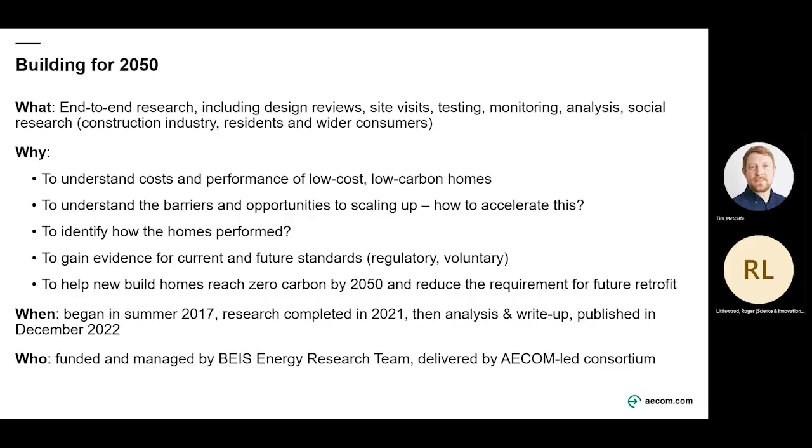So our approach to this project was to study in depth 4 case studies across different tenures, and to really look right from the very beginning, the decisions why people chose to do low cost, low carbon homes, all the way through to the resident experience of people living in them for a period of time, monitoring that performance and what they experienced.

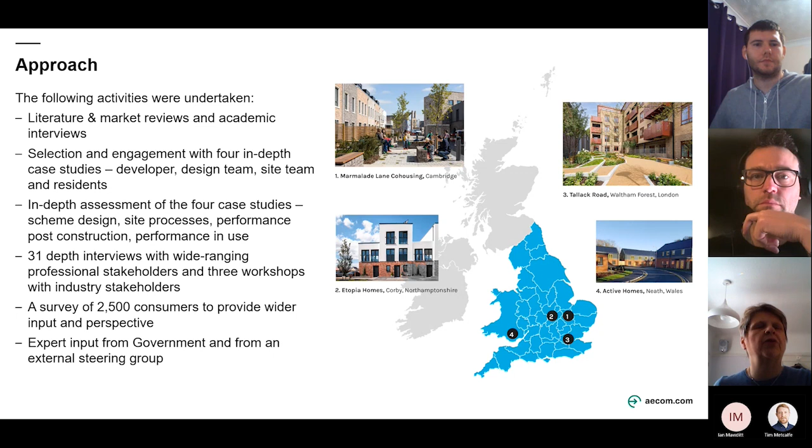Having started with a literature and market review, we did in-depth case studies, and then professional interviews to supplement the case studies to get a wider view from the industry, including some workshops with industry. We carried out research with householders and residents within the homes, but then topped that up with a survey of 2,500 consumers to get a wider perspective. We also had expert input from government and from an external steering group.

So a wide range of experience has been captured through this project. The developers had different drivers and funding models, and the design teams also chose a range of different routes to deliver low carbon homes.

We believe this project is unique in that it focused on social research with developers and design teams, in-depth studies during construction, post-construction testing, and then social research again with residents through interviews, monthly diaries, focus groups, etc. We also carried out a comparison with SAP to see what difference the results measured on site through post-completion testing gave when applied to modelling compared to predicted energy performance.

Overall, we looked at how low carbon homes fit within a changing energy system, and possibly one of the most interesting things is the review of additional capital costs, and how much that is a barrier or not for developers developing these types of homes.

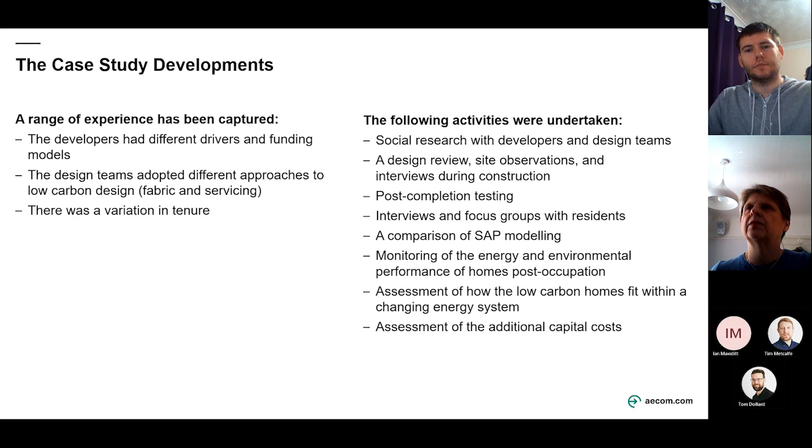To cut straight to the findings, we'll hear more about the process as we go forward. Really, the main driver was policy and regulations. Building regulations, but also planning policy, were very important within these projects, and were reasons why people chose to go beyond required energy performance. There is increasingly a business case to do it, with more funding driven by ESG funding and investment groups, and that was a change during the course of the research.

Some of the projects had low carbon stakeholders driving the innovation. That could be an expert group, such as an academic body or an individual company with expertise, or indeed a wider perspective—for example, in the Swansea City Deal vision, looking at how the use of local timber could boost the local economy as well as driving forward low carbon homes.

Some of the schemes had grant funding, and that provided an incentive as well. If it's grant funding for innovation, then those developing homes that were going to qualify for that were looking to really maximise the use of innovation and different technologies.

Overall, during the course of our study, we found increased awareness of the climate emergency, which might range from councillors through to residents, and that drives the desire to deliver against that through low carbon homes.

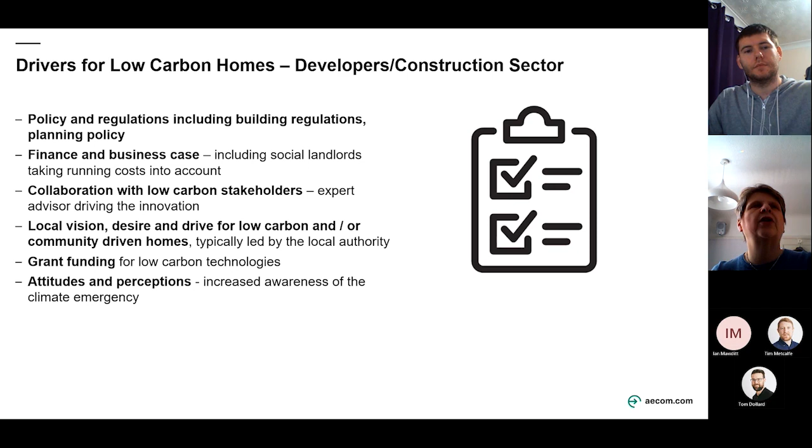Increased cost and scheme viability was less of a barrier than originally thought. We found that some of the developments only had an increased cost of 1% to 3% more, whereas initial discussions with stakeholders suggested they perceived it likely to be a 5 or 10% increase in cost. The cost increase very much relates to the simplicity of design—those with a higher cost had focused more on innovation and had achieved grant funding towards some of those additional costs.

There is a concern that acts as a barrier, the concern about the lack of electricity. Each of these homes had an electrical form of heating and no gas, meaning they're dependent on the national grid to provide that electricity. There's a whole model here whereby the upgrade, if necessary, for local infrastructure such as electrical substations is borne by developers, and not in the traditional way of paying back simply through standing charges, as would be the case for gas infrastructure being provided.

Another barrier put forward is that some developers have concerns that if they price in the additional cost of low carbon measures, then the price they can offer for a site would be a bit lower than for somebody providing to a regulatory benchmark or minimum performance. Therefore, they have concerns that if they can't pass on the cost through increased sales prices, they won't be competitive and won't actually be able to deliver homes in the first place.

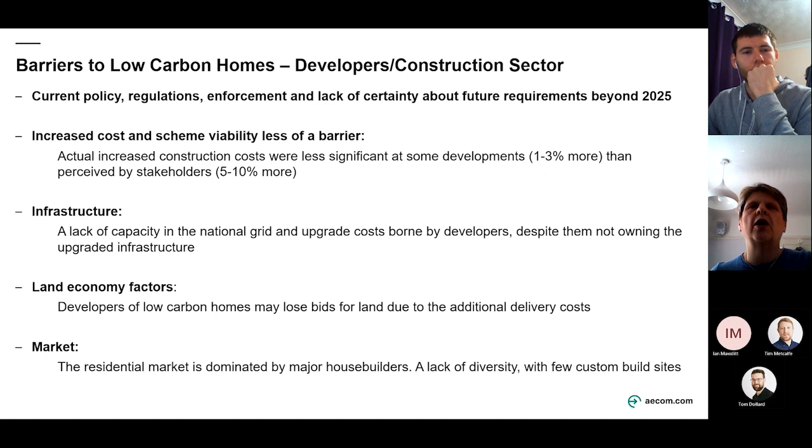The final barrier here was that the market is dominated by major house builders. At the time, there were no major house builders building low carbon homes. So if that's not being taken forward by the major house builders, then those who are SMEs trying to get into the market will struggle.

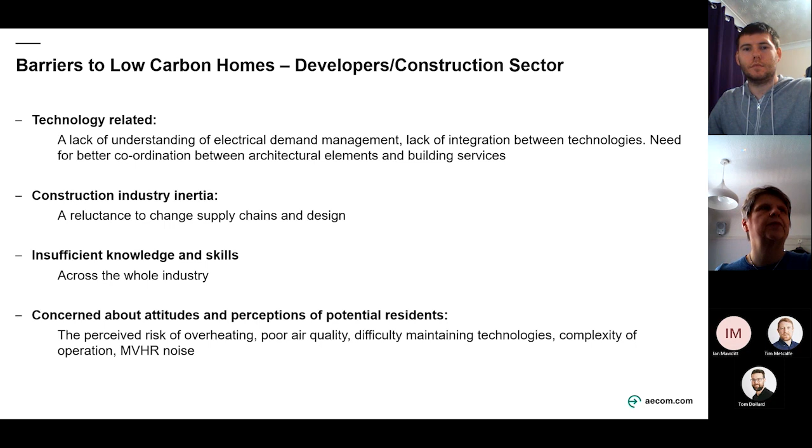So that was what we were being advised at the beginning of the project were the barriers for developers and the construction sector more widely. After the full five years of research, focusing in detail on the case studies, but also the wider inputs that we had from industry and from residents and householders in general, we ended up with lots of learning points. Firstly, focusing around supply and demand, and then secondly on performance.

So industry groups feel they need certainty on the future for low carbon homes, what the scope will be, what the timing will be of regulatory requirements, where planners can set the bar if they wish to go beyond regulation, so that they can plan ahead. So we are talking here about a step change in the performance of homes. This project was around low carbon homes. We're now very much hearing zero carbon homes.

And if the industry has to gear up for this step change in what they're providing and in the performance of these homes, then they want certainty on when these changes have to be made, and they need notice and they need to plan for it. So if a developer is master planning a site at the moment, these homes might not come forward for the next 10 years. And so without this longer term view, it's extremely difficult to make plans and provisions for low carbon homes.

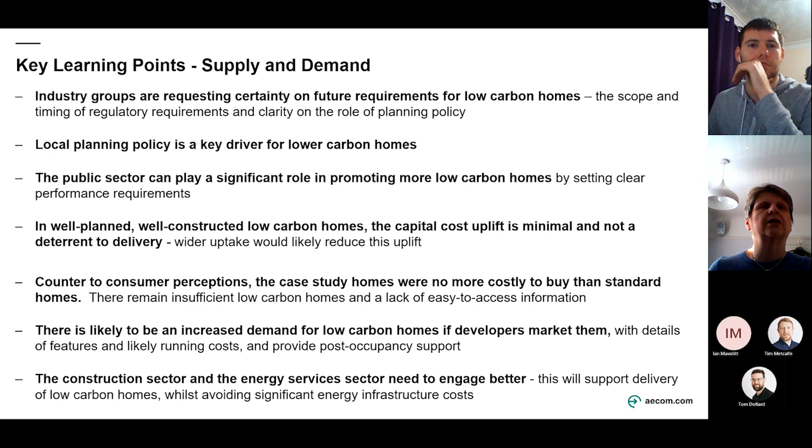And the construction sector doesn't seem to really have understood that energy use is a key part of home design as we go forward, and they need to better understand what the energy services sector can offer, from the forms of heating within the home through to means of avoiding significant energy infrastructure costs through balancing demand and it not all happening at the same time.

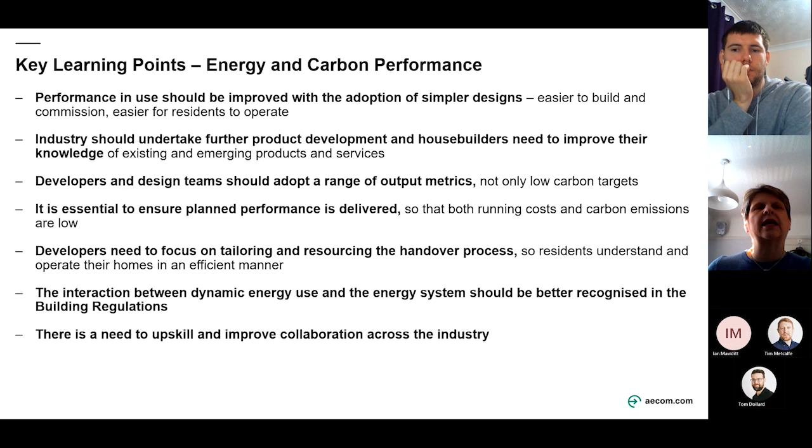and then all the way through to commissioning homes correctly, getting systems right, making sure they're accessible, ensuring that there are people in the industry trained up to be able to maintain heat pumps and newer technologies, all the way through to the handover, which is often done by the sales team. So even the sales team need to know what they're offering, and before that the marketing team, so that people understand what their new homes are and can get the best from them.

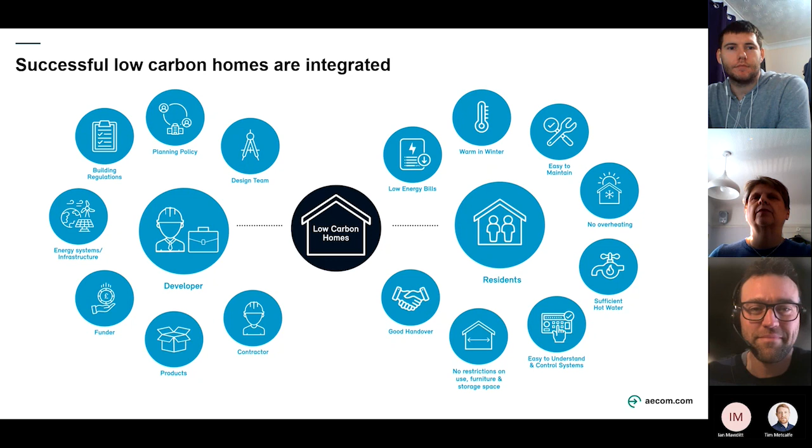Thanks, Alison. Hello, everybody. I'm Tom Dollard, partner of sustainability at Pollard Thomas Edwards, and we were leading on the design reviews, site reviews, and stakeholder interviews of the low carbon case studies.

And the design review and the site reviews were really there to show us what were the practical implications for industry, what were the practical implications across the case studies in terms of program, cost, the design, the layouts, even the look of the homes, and the buildability, whether these homes were more difficult to build, whether they presented any unique problems for the contractors and for the supply chain, and any more specific site implications that we found.

So we carried out a detailed review from the beginning of a project. We were there with the brief, the pre-planning, detailed design, all the way through to site and handover. And we had typically 7 site reviews, 7 site visits to assess and witness all stages of construction. So next slide, please.

So the four case studies, this was the first one, Marmalade Lane in Cambridge. And this was a co-housing community, 42 homes. There were some apartments as well as some terraced houses.

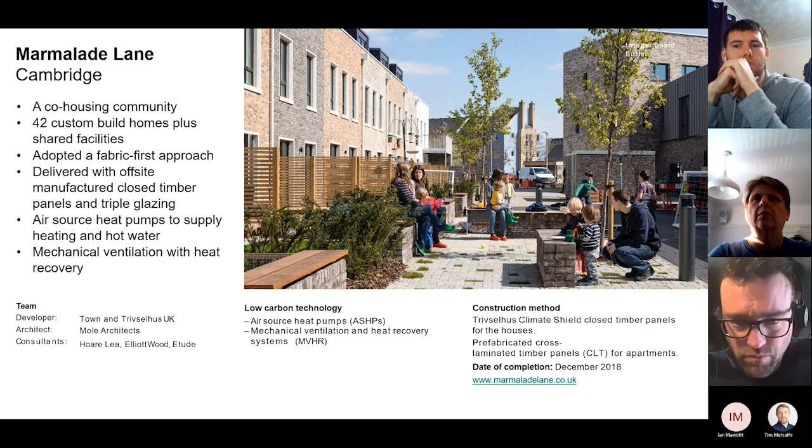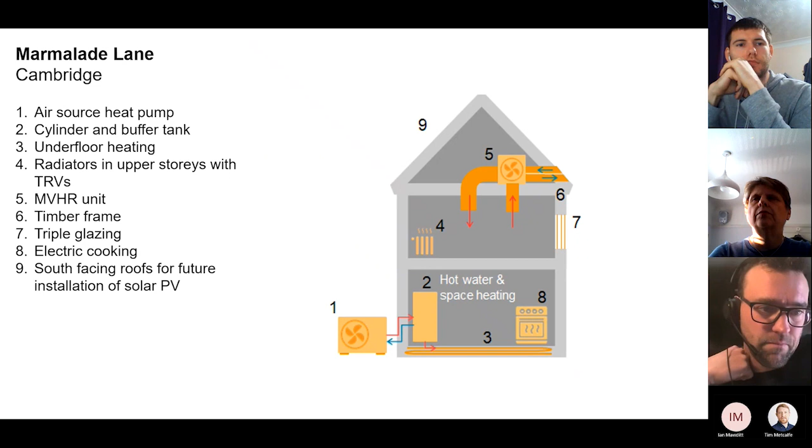The second case study was in South Wales, in Neath, and this was a social housing landlord, Pobl Group, so affordable rent, 16 social rent homes.

And then the PV fed individual batteries on each house, and then there was the hot water provided by an air source heat pump with a preheat provided by transpired solar collectors. Again, it had some on-peak electric space heating as well, and MVHR ventilation.

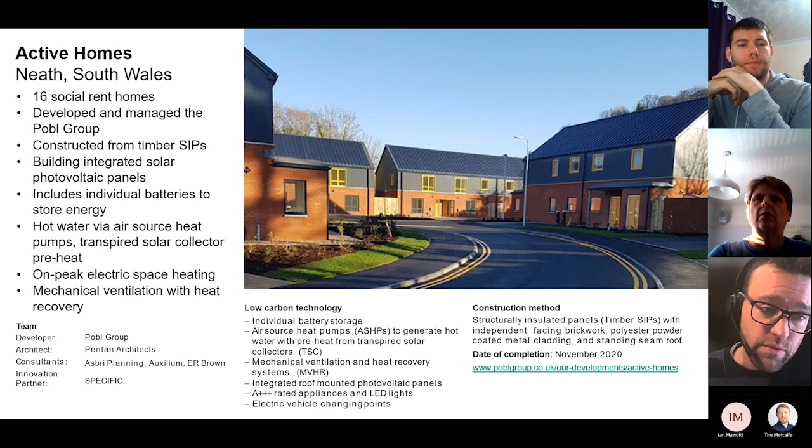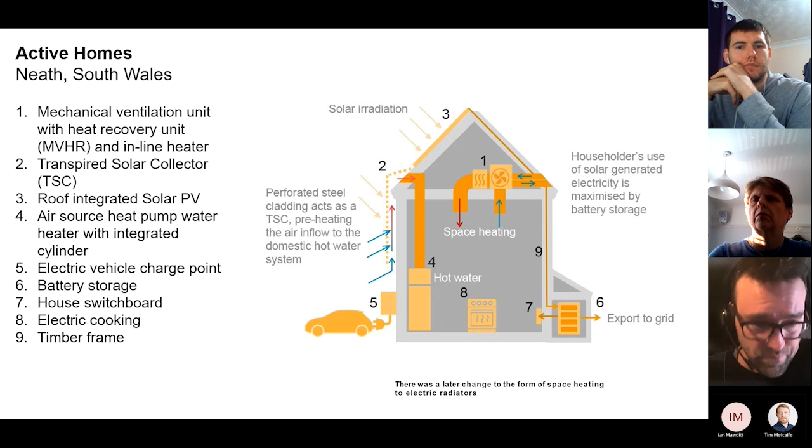The third case study was Etopia Homes in Corby, 47 homes this time, slightly larger. Again, it was with MMC construction, this time using steel SIPs, so a steel panel, and a small format panel as well that was put together by hand on site. And they were aiming to be energy positive.

The previous case was aiming to be active homes. This was quite similar in that it was meant to be energy positive over the year. And it did that with a lot of PVs on the roof, some PVT on the roof, PV thermal array, and a ground source heat pump with an earth store energy bank. So again, quite a complex MEP system. And then it had a smart home energy management system.

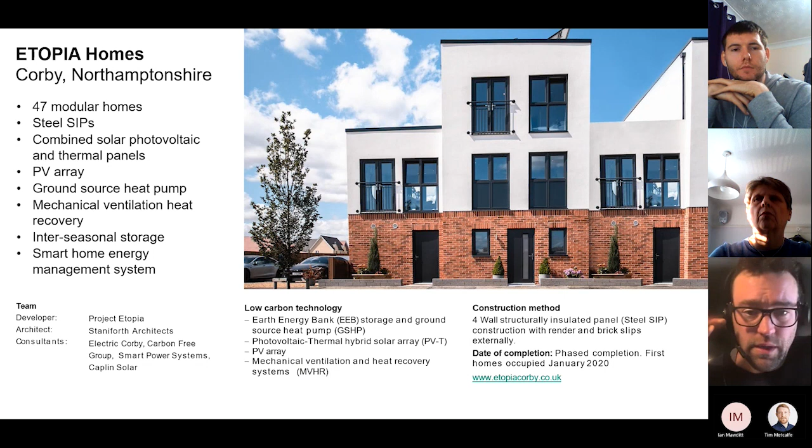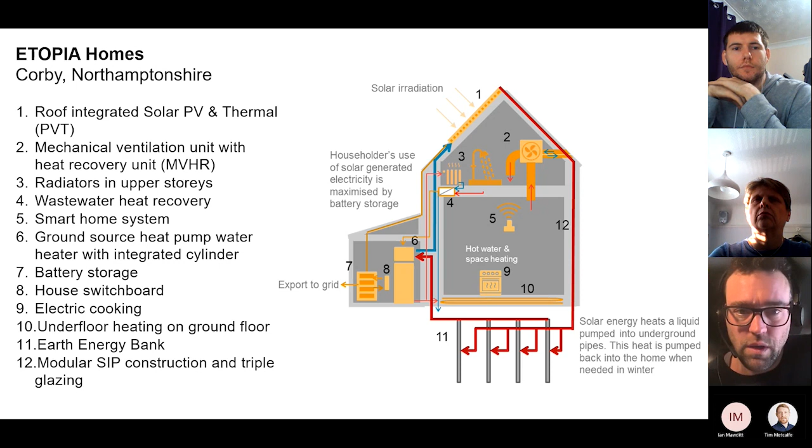The next slide shows the schematic of how that works with the Earth Energy Bank and the ground source connecting into the cylinder, and then you've got the PV and the PVT charging the battery. And the final case study was in London, an apartment scheme this time with two townhouses to the side of this apartment block.

This was innovative and low carbon because of its air source heat pump. It was a communal air source heat pump providing an ambient loop that linked to water source heat pumps in each flat. A relatively innovative solution, also supplemented by solar photovoltaic panels. And to note, this was a traditional brick construction with a concrete frame, so fairly normal construction for London there.

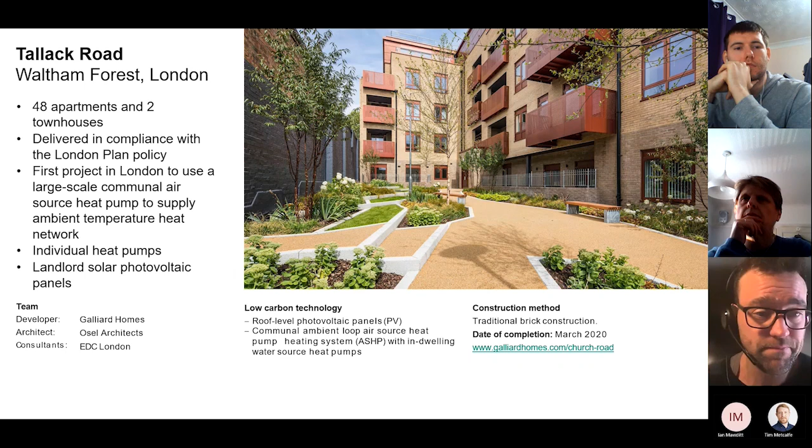This schematic shows how that ambient loop is fed by an air source heat pump on the roof and then connects to the individual heat pumps in each flat.

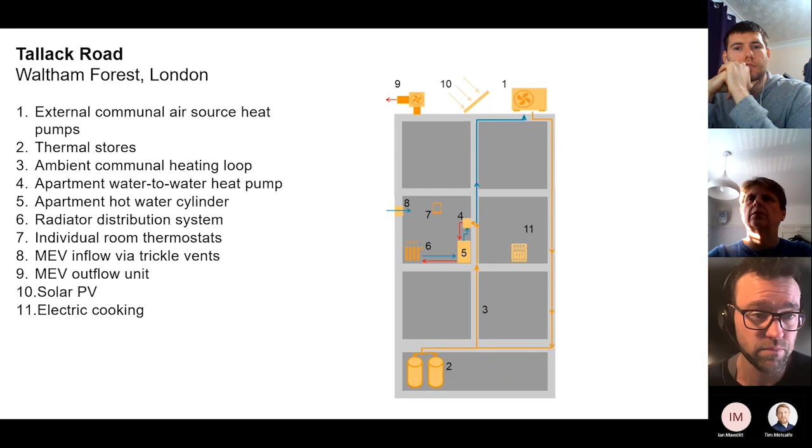So why had that been the case? The main finding was that there are a variety of different ways that you can deliver successful low carbon homes. Generally, they required electric heating and hot water, so in this case, they're all a type of heat pump.

And we also find that complex designs have been simplified further on. Some of the developers, all of the developers are still in business, and they've simplified these designs on their next sites.

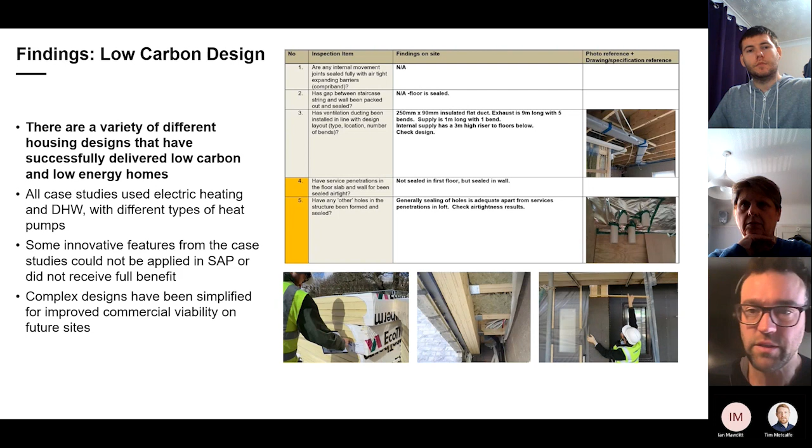In terms of the cost, we analysed that at various different stages: the construction estimate prior to construction and the final account after construction. We can clearly see there is an additional cost to low carbon homes. Some of these case studies that were able to refine the design and go through a value engineering process showed that to be 1 to 2.5% extra. But then some of them, where they had grant funding and a more complex design, were up between 10 and 20% extra. So the cost uplift depends on the source of funding, and it's obviously linked to the design and the complexity of the installation.

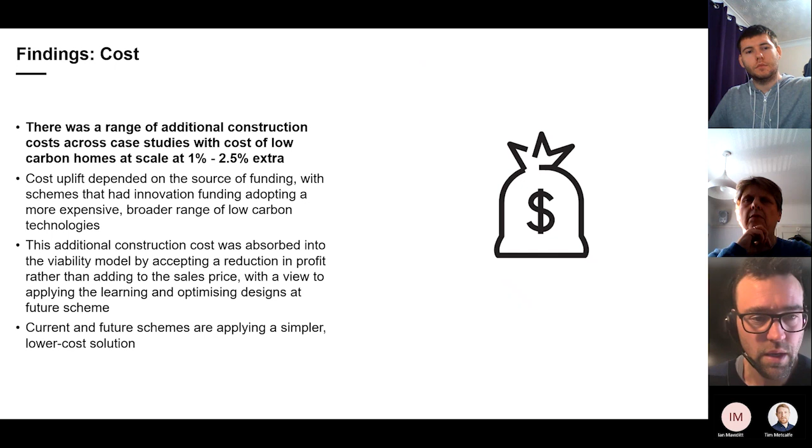And then the skills gap, Alison mentioned that in the findings. We saw that on site and in the design review process, where we were part of meetings as well, that there is a shortage of skills across the industry at each stage, and that's going to be a challenge for scaling up. We also saw that developers were unfamiliar with specialists providing low carbon services, so that link between the energy system and the housing industry being a gap.

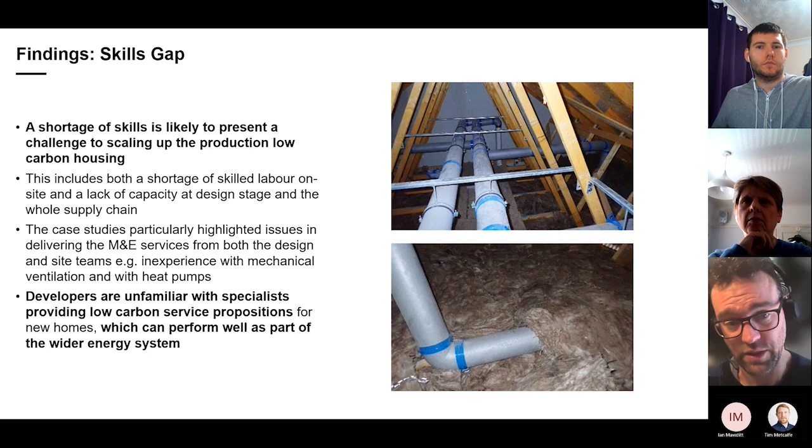And then just a note on MMC: we had 3 out of 4 of the case studies delivered using a panelized system, and we certainly saw the benefits in that. We saw that the panels themselves were performing very well, and I think Ian will show you a bit more detail on that. But they do depend very much on the design still, and the junctions between site and the interface between site and the factory is critical.

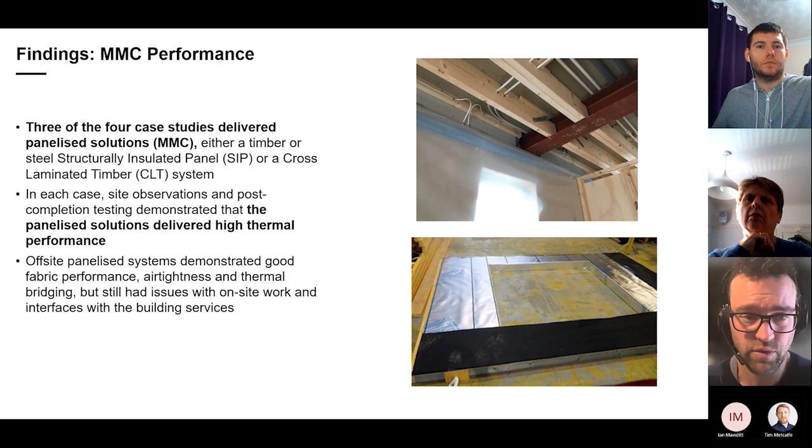I think that's it. Yes, over to Ian. Thank you.

Thanks, Tim. So yes, I'm Ian Mawditt. I'm a building performance researcher at Fourwalls Consultants, and I'll give you a summary of the findings from the post-construction testing and the in-use monitoring that we carried out at the developments.

Next slide, please. I'll start with the findings from the post-construction testing. We conducted a number of tests. This typically included coheating tests, in situ U-value measurements, thermography studies, and air tightness testing and ventilation measurements. Many of the tests are to evaluate the fabric efficiency of the case study dwellings. Typically for the post-construction testing, we studied 2 sample dwellings on each case study development.

What we tended to find across these developments was that, for the measured U-values, these were often found to be quite comparable to the design values. The biggest issue we tended to find on the fabric side was the air tightness and thermal bridging. There were still some challenges there. But overall, the fabric was generally better than equivalent new homes that are built to meet the minimum standard for energy efficiency and carbon emissions under Part L.

Using these findings from the post-construction testing, we recalculated the SAP calculations and compared those with adjustments to those provided by the developer as part of their Part L compliance submissions. For the fabric efficiency part, the DFEE value in SAP, we found that the adjustments with the post-construction testing saw a 10% increase in the fabric efficiency figure, so that's poorer than the developer's SAP. In one case, one of the schemes was twice as bad as predicted, so 100% poorer than predicted. But in that case, that wasn't necessarily to do with defects found through the air tightness and thermal bridging alone. That was simply the readjusted SAP taking into account heat losses through the communal walls into an unheated corridor area and communal areas that hadn't previously been accounted for in the developer's SAP.

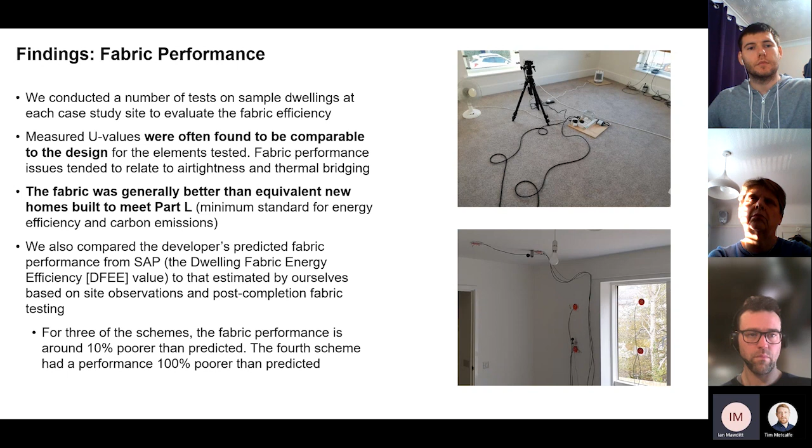Next slide, please. As mentioned, one of the areas where there were challenges was the air tightness. A lot of the schemes had set themselves fairly challenging air tightness targets. In all cases, the design air tightness was below an air permeability of 3 meters cubed per hour per meter squared of envelope area at 50 pascals.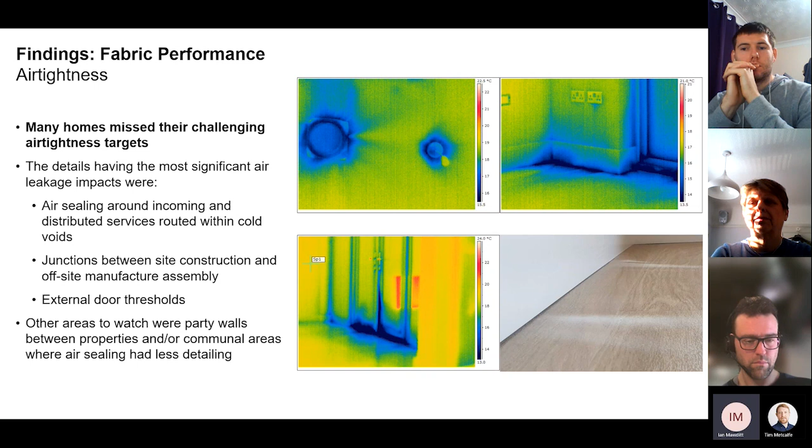The other area where there were challenges was associated with thermal bridges. In this case, the top left image, the yellow and red areas show heat loss coming out of the building.

The column shown in the image shows the temperature gradient, hot at the top with the red colour, and the heat being transferred down the column.

So balconies and steel penetrations through the thermal envelope of the building were found to be weak points.

Also, thermal bridges occur at external door thresholds, where the structural components of the external door have tended to disrupt the perimeter insulation. That was another key thermal bridge finding on many of the developments.

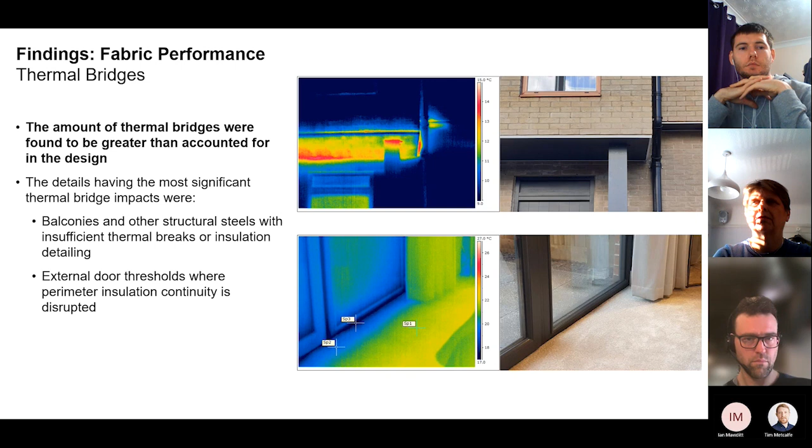Moving into the monitoring, and combining our monitoring findings with the post-construction testing, we aimed to get 10 homes monitored on each development - that's in-use monitoring while people are living in them. The intention was to measure heating, hot water, and other energy uses. So this slide is showing the hot water and space heating energy use.

across the developments, split out between houses and flats. In each case, to allow comparison across the developments, the energy use has been changed to a ratio to compare with the Part L SAP 2012 notional building, shown by the red dotted line.

We want all of the stacks to be below that red dotted line for them to comply with Part L. The orange stack is the measured energy use in each case, the red stack is the developer's original SAP, and

the blue colour is the Building for 2050 readjusted SAP, taking into account the observations I've just discussed about air leakage, thermal bridging, and other issues that we found.

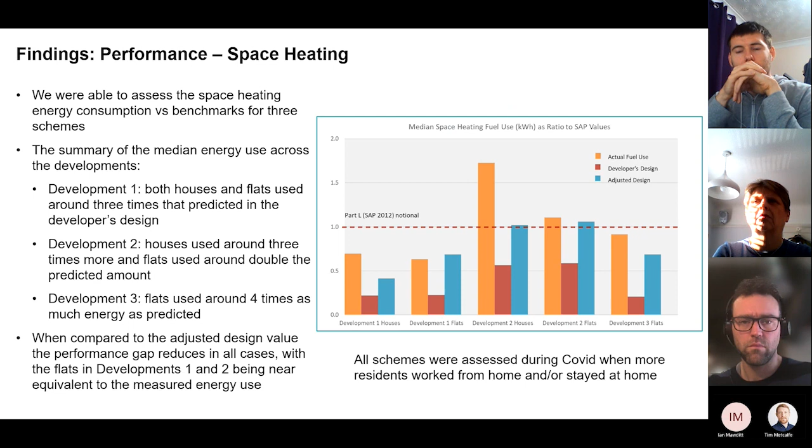The post-construction testing we carried out didn't really impact the predictions for hot water. In this case, you can see the blue stacks and red stacks - that's the Building for 2050 adjusted SAP in blue and the developer's original predicted SAP in red. There's not much change to these predictions.

Compared to the measured energy use, in all cases the measured energy use was less than both predictions.

Some of the reasons for that were to do with, in many cases, certainly for larger homes, there was less occupant density. So we might have a 3 or 4 bedroom house that's only got 2 or 3 people in it, so there's going to be less hot water demand than the SAP calculation would have predicted anyway.

But in other cases where there is greater dwelling density with a larger number of occupants, there was feedback from some of those occupants that they didn't have sufficient hot water for their needs. That particularly was the case in development 2, but even so, in that situation where they probably would have used more hot water energy to overcome that, it still didn't increase above the prediction.

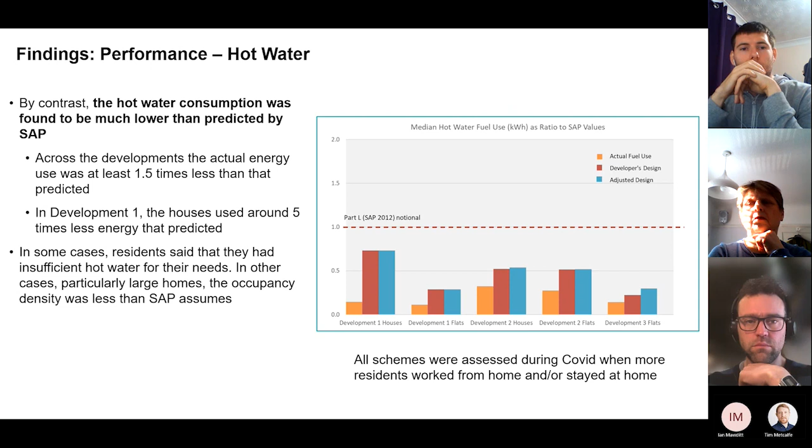Looking at CO2 emissions now, this is the same as the energy charts in that we're representing the comparisons using a ratio to Part L 2012, Part L 2013, which uses SAP 2012. That's shown by the red dotted line, and again we want all of our stacks to be below that line.

If we look at the green stacks and the purple stacks first, the green stacks are the results by the developers as-built SAP calculations, and the purple being the Building for 2050 adjusted SAPs. We can see there's quite an increase across the developments between those stacks, and certainly for development 2, where the intention was for them to be more carbon positive, that didn't really materialize in practice.

In development 1, you can see the flats there. Even though the energy use wasn't found to be an issue, we did find during the monitoring period that there was an issue with the COP of the communal air source heat pump system, which was being rectified during the monitoring period. So the COP wasn't as optimal as it should have been.

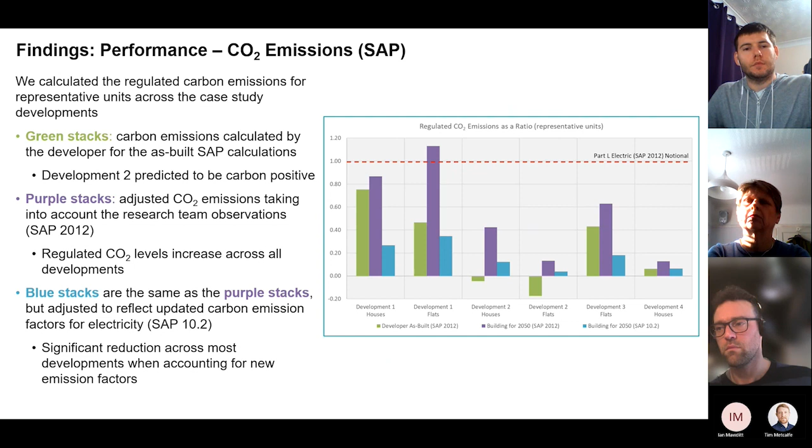So to finish on comfort and indoor air quality, because this is obviously important for residents as much as the energy bills they have to pay, they have to be, you would expect, comfortable in low carbon homes. The feedback generally was quite positive. Most residents felt good levels of thermal comfort during the winter time certainly, their homes were comfortable throughout, and they said there was good heat retention.

There were no issues really with condensation and mold, as you would expect in these sort of homes. The fabric is nice and warm, so there's little issues to do with condensation and mold. Where there was some condensation or mold, we found that was due to suboptimal commissioning of the ventilation system rather than particular fabric defects.

In two of the schemes, some residents did report that the air was dry, but on those schemes, rather than under-ventilation, which is a common finding, it was more due to over-ventilation. The ventilation had been commissioned to move more air in than was necessary, and in winter that can create drier conditions. That's backed up by our monitoring of those residents' observations.

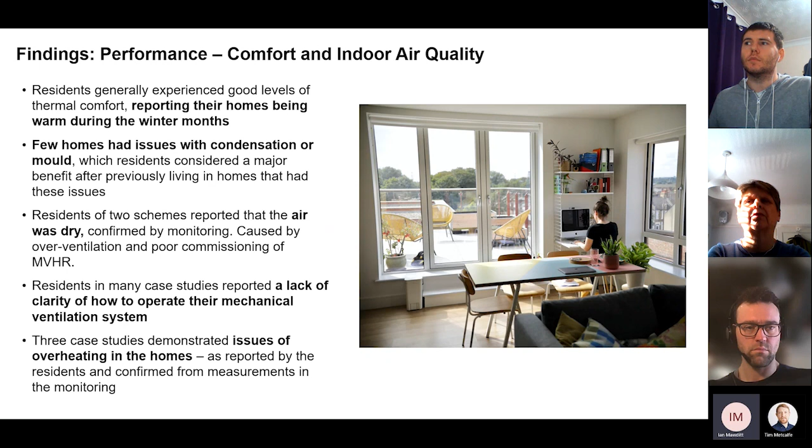Hi everyone, my name's Alex Lurchak. I work in the social market research team at AECOM, and together with my colleague Joe Christensen, we were responsible for conducting the social research with residents at each of the 4 case study developments.

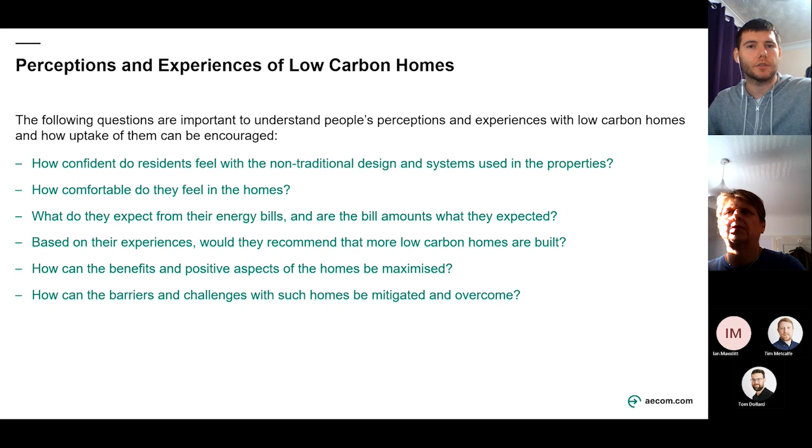The social research element was recognised as being very important from the start. It's not just important to understand construction quality and the performance of the homes and technologies. If the aim is to accelerate the uptake of low carbon homes, it's very important to understand the demand and views of people towards such properties, and for those living in them, understanding their experiences is a significant part of that journey. The questions you see on screen are just some examples of what we looked at with our research.

To give some background into our methodology, at each of the 4 schemes we collaborated with the developer and their teams to identify potential residents willing to participate in the social research. This resulted in a sample of 55 residents across the 4 schemes who had made the decision to either purchase or rent a low carbon home.

With each resident, we interviewed them prior to occupancy to explore their decision-making process and understand their general expectations about their new homes. To discuss their views and experiences after moving in, we interviewed each resident after 3 months of occupancy, and then conducted a focus group with residents at each development after 12 months of occupancy, or as late as we could if it wasn't the full 12 months.

In addition to the interviews and focus groups, each resident produced short monthly diaries over the course of occupancy to reflect on their views and experiences, allowing us to see how their experiences and attitudes changed over time. These diaries were also really useful for comparing against the monitoring data collected, as Ian was just talking about. It helps us see where any change in behaviour happened, or key changes that might affect the data, like going away on holiday for a few weeks.

The social research focused mainly on the 4 case study developments, but a wider survey was also undertaken with a larger sample of consumers to understand the interest and demand for low carbon housing on a larger level.

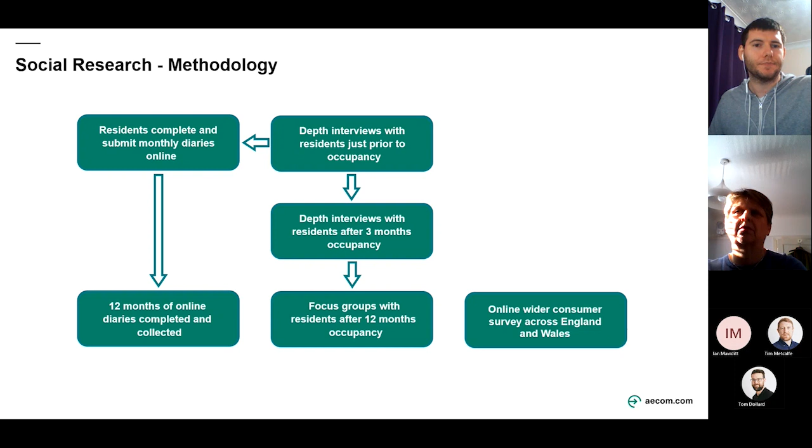I want to share some of the main overarching findings in terms of the perceived drivers and barriers to living in a low carbon home, as well as the benefits and challenges faced while living in them. Starting with the drivers, we found the main factors influencing home buyers and renters were location, price, and the size and design of a property. Although less influential for most, the specific drivers related to low carbon homes were lower energy bills and running costs.

This was the main driver for almost 60% of the wider survey respondents, and most residents from the social research said it was a key attraction for them, and it was also a key selling point that some of the developers used.

Having a reduced environmental impact was a driver for some who were specifically seeking a low carbon home, and 50% of the wider survey respondents said they expected it to be one of the main benefits. Having a warm and comfortable home with good air quality was another key driver for most, and they were expecting their homes would maintain a steady temperature throughout the year.

Another driver for many was having a new, modern and high quality property. The final driver was having a gas-free home, with some people saying it made the homes feel greener, but also safer to live in.

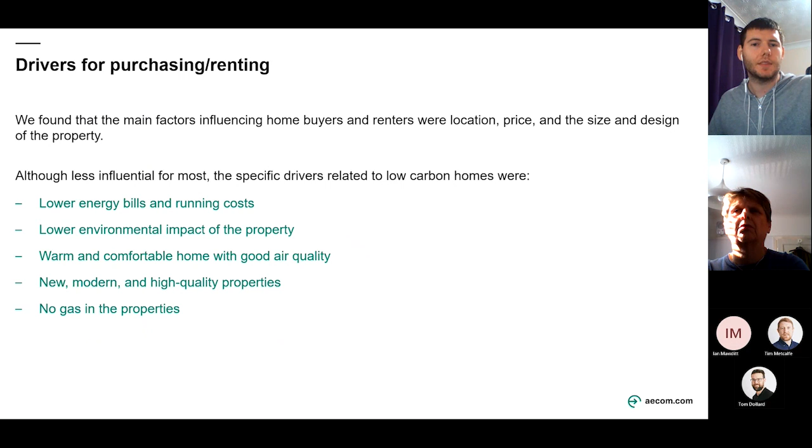In terms of the barriers to purchasing or renting a low carbon home, although the case study properties were sold at market rate, as discussed earlier by Alison, around half of residents believe that low carbon homes in general are more expensive than traditional homes. This was also the main barrier perceived by those who answered the wider survey, with over 60% of people saying this was one of the main barriers.

A key physical barrier was considered to be the lack of availability and awareness of low carbon homes across England and Wales. As mentioned earlier, how do people find out about specific features of a home that makes it low carbon or more sustainable? How do you find out where these properties are, where they exist, things like that? In terms of living in a low carbon home, one of the main concerns was that the technology would not perform as expected.

Some shared concerns about the reliability of systems and what maintenance might be required from them. Another concern with some residents was that technologies, wiring, pipe work, and things like that might be very visible and take up usable space in the home. They just weren't sure how much it would differ from what you see in a traditional home.

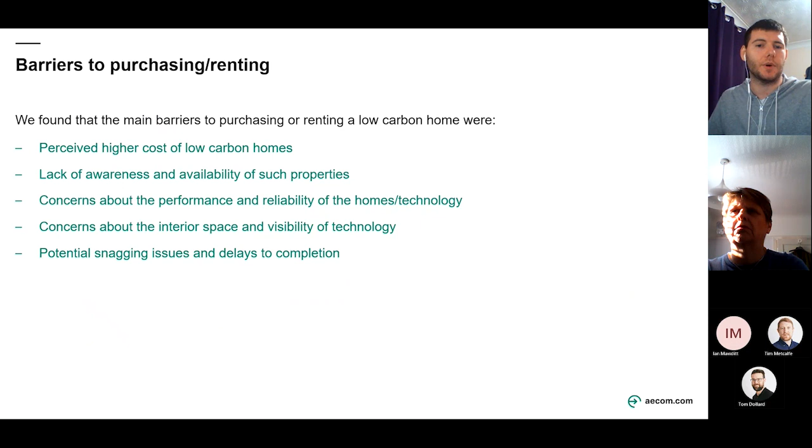And finally, there was some concern shared in the pre-occupancy interviews that because the properties were different to traditional housing, there could be more snagging issues, or the completion date for the homes might slip, leading to potential delays for when people actually move in. Next slide, please.

So from living in the case study developments, residents considered the main benefits of their new homes to be that they were warm and provided a comfortable environment. Most reported that they retained heat well, and although some experienced overheating in their first summer, this generally improved as they got used to the technology, and some also implemented things like solar shading and established window opening routines that worked well for them to manage their comfort in the home.

Most residents felt that the air quality and ventilation was good, and very few had experienced any issues with mold, damp, or condensation. For some residents, living in a low carbon home and reducing their environmental impact was considered to be a key benefit, particularly those who were specifically looking to do that by buying this home. However, some said they considered it more of an added bonus, but they did say that they appreciated having a lower carbon footprint without having to significantly change their behaviour.

In terms of energy bills, there were mixed opinions and experiences across the developments with these. Some found that their bills were as low or lower than they expected, whereas others found that they were higher than expected. Next slide, please.

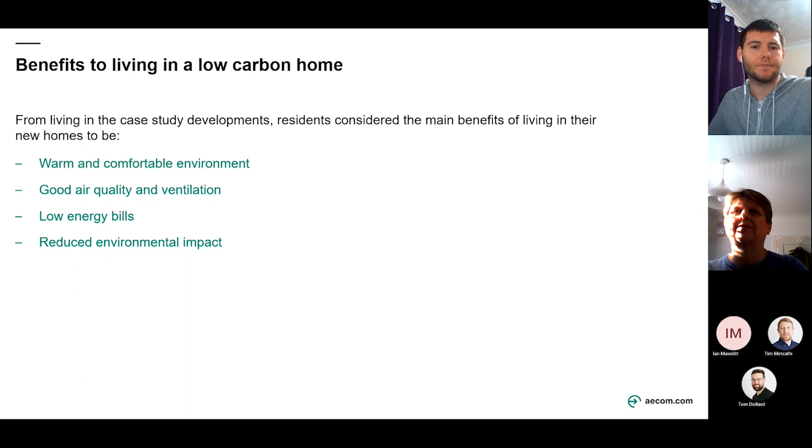And that leads us directly onto the challenges. And as I mentioned there, one of the main challenges faced was that energy bills were higher than expected for some people. And in some cases, it was much higher than their previous homes, which they considered to be inefficient, older, drafty. They just weren't expecting the bills to be higher. This, as Alison mentioned before, shows that having a low carbon design does not necessarily translate to lower energy bills, particularly when moving from gas central heating to an electric heat pump.

A challenge that was expected prior to occupancy and was faced by most residents was learning about and using the technologies and systems in their home. While most found it quite difficult, some said they found it easy to understand and manage, but most people said they felt that more training and information should have been provided, particularly in-person, face-to-face training to show people exactly what to do to change their systems and alter their settings.

There was also a more general concern around servicing and repairing low-carbon technologies, with this being shared by residents as well as almost 40% of the wider survey respondents. This concern was finding someone to fix things if they go wrong. And residents talked about a few occasions where they called out plumbers or electricians who either didn't know what to do with the systems because they had no experience with them, or they tried to fix them, but unfortunately made things worse.

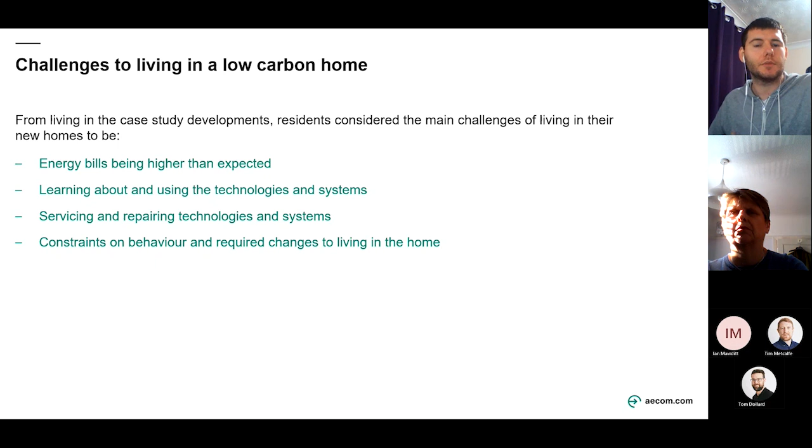And finally, around half of residents felt that they were constrained with their activities in their new homes because of the systems and the technologies and the way they were set up. And this required them to adjust their behaviour and routines. Examples of this are having insufficient hot water at times, being used to having combi boilers, and having to be more careful about when they use hot water. And some were not able to adjust their maximum space heating temperature. So again, that was an adjustment that they had to make. Next slide, please.

And by the end of the research period, most residents said they were still happy with their decision to purchase, and almost all felt that more low carbon homes should be built. However, they felt that a number of aspects should be considered further when designing, building and selling or letting such properties, such as running costs, coordination and complexity of the technology used, having greater on-site experience and improving the handover process and amount of training provided to new residents, just to make that transition easier into homes that they're unfamiliar with.